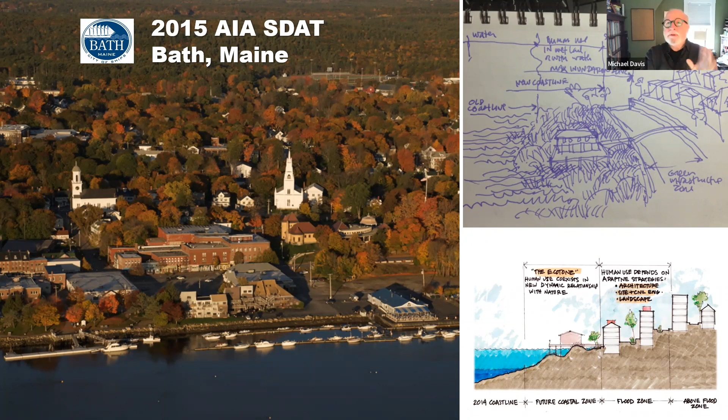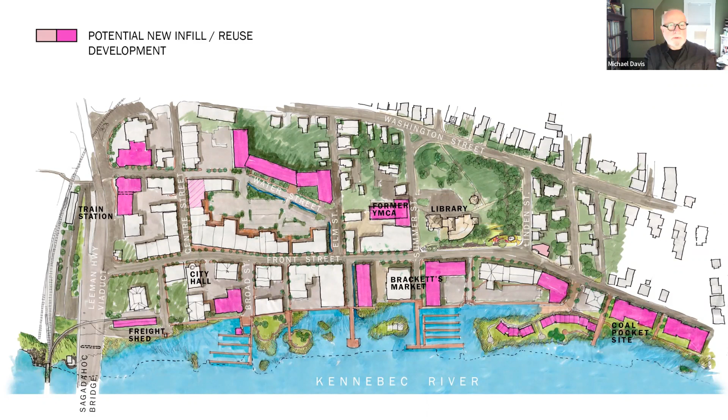So again, we're trying to say that this could be a good thing. This could still end up being a good thing for this community.

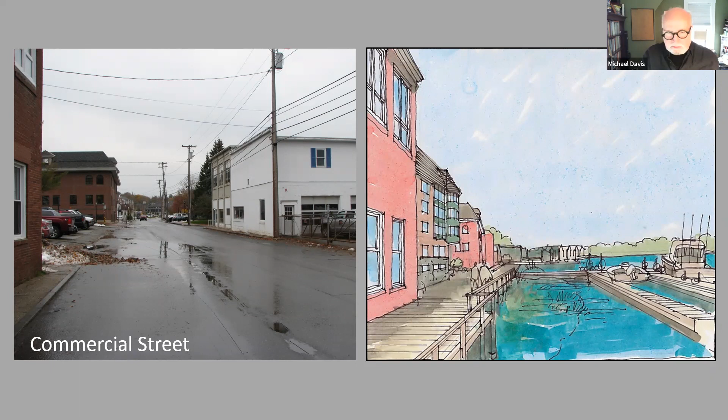Meanwhile, up on High Street, which is aptly named because the water's not going to go there, this is where you could really look for greater density. What we're showing is this beautiful little historic building with new housing on top of it, 3, 4, 5 floors of housing. We're always looking for places to put housing, especially affordable housing near a city center. So this is a good place to put housing on this building that is not going to get flooded.

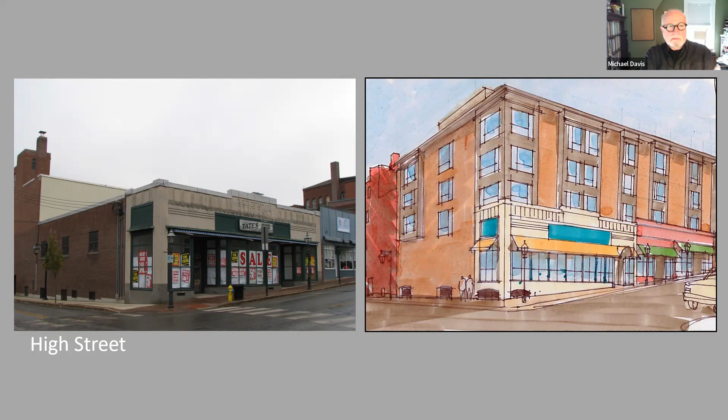And then in the middle of the city is a place aptly named Water Street. This is one of those places that we know is going to be prone to flooding. So the idea is to get the water out as soon as possible, to contain it as effectively as you can. We pulled back and did an aerial sketch of this parking lot, a lot of which has been turned into green infrastructure—a swale, a bioswale, and a basin—to take the water that gets into the site off of the site as quickly as possible.

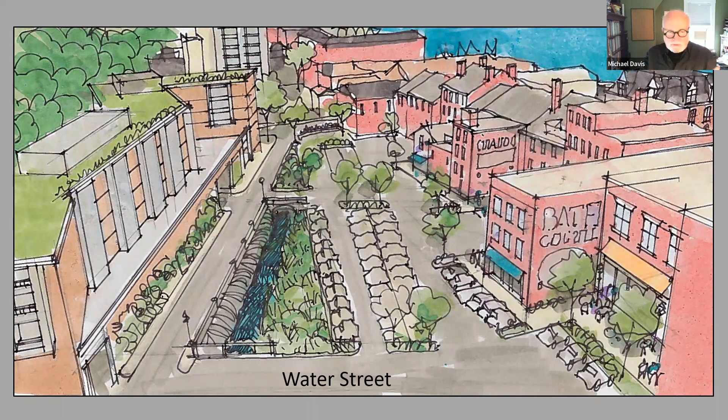And then on this uphill side, we're showing some new housing on top of parking, because the parking is going to get wet too, and we don't want to suggest there are new habitable, occupiable uses in the flood zone. So those are the kind of studies we did for Bath, Maine.

How do we fix that? Our approach was to look at the neighborhood and imagine it as a vital, thriving, connected part of the city. What would that look like? What shape would it take?

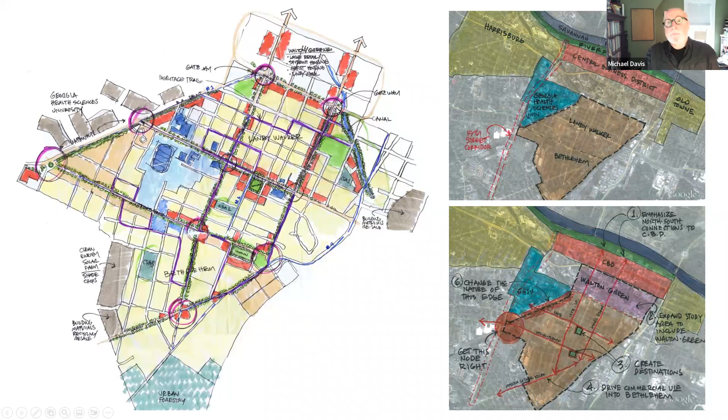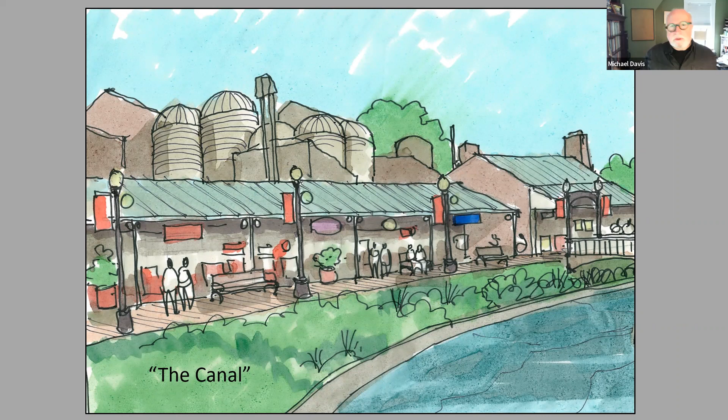Just around the corner from that site is what used to be some of their industrial sites, and it's largely abandoned. This is a canal now that serves as a bioswale for rainwater, but nobody goes here because it's in terrible shape. So we're thinking you could turn this into a promenade, make it an arts district or shopping district along the canal, really make an asset out of it, and renovate the historic industrial buildings. This could be a real important place in the neighborhood.

And then this is a really important edge. This is the edge where on the left is the hospital, that giant employment base. On the right is the neighborhood, and what separates them is the tracks. This is literally the other side of the tracks, called the Dent Boulevard. So we're saying this needs to be a really important edge of this neighborhood. We need to change this drastically.

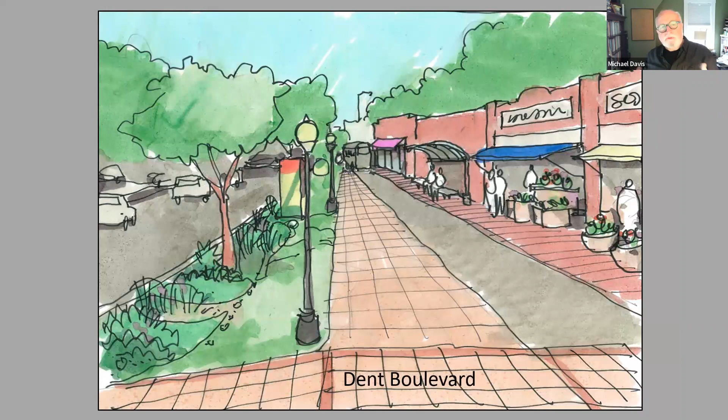And this change involves a really major step that I don't know how this happens, but we said let's get rid of the train and replace it with light rail or bus transportation. So it becomes part of the way that people get into downtown, instead of a barricade, instead of an obstacle between the employer and the residents.

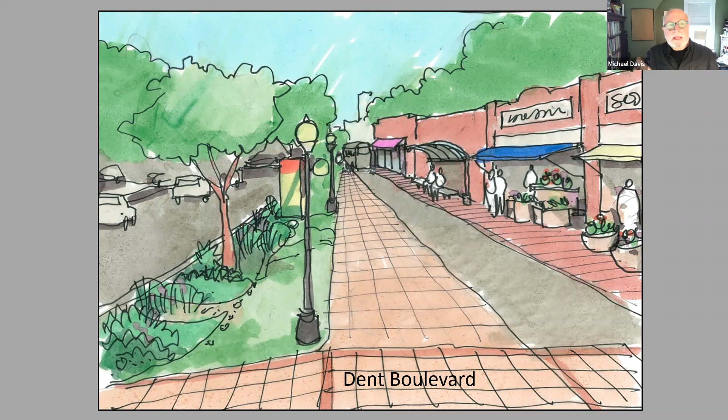So this was a big step. But part of what we're saying here is that you really need to pay attention to that edge of your neighborhood, because this is where you actually interface with the major employer. This needs to be changed. So those are the sketches that we did for Augusta, Georgia.

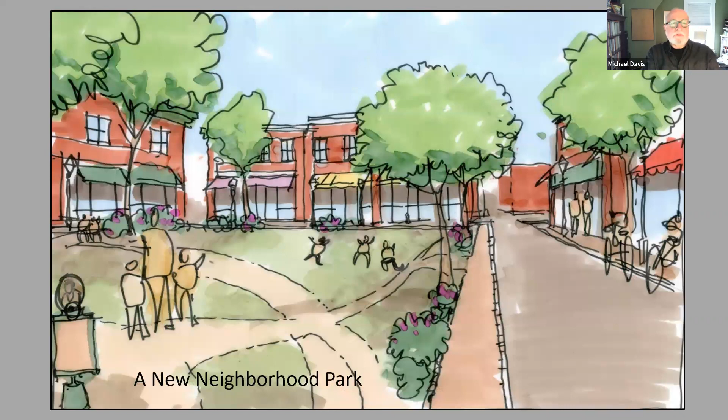And there are no parks within this neighborhood. There were absolutely no usable outdoor recreational spaces. So we said, look, take one of your empty lots, turn it into a park. It'll look like this. Every neighborhood should have these kinds of spaces in them, right?

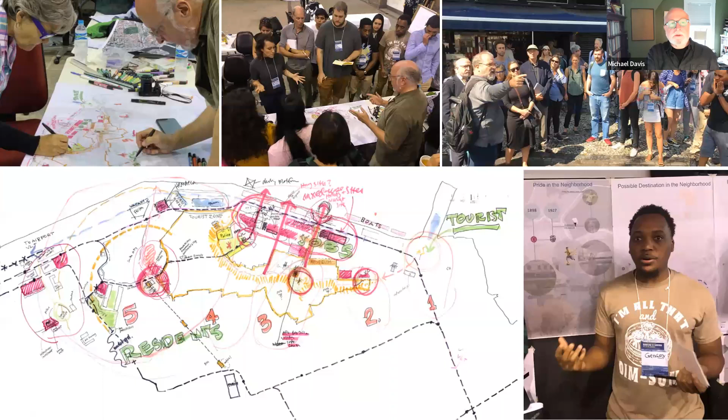We said, no, let's talk about the residents, about the favelas and what the people that live here need first, because that's really where you start. So here we are talking to some students—one of our team was from a University in Florida, and they brought a community group—and we started scribbling. This is the beginning of our map, where we're talking about here are the tourists, here's where the employment is, but here are the residents. So how do we bring all three populations together and serve all their needs?

So this was our giant master plan. We talked about these improvement zones—this one, the old warehouse district, and stuff over here, and these edges. I want to show you a couple of these sketches. This was a lot of information all at once, but again, what's cool are the sketches.

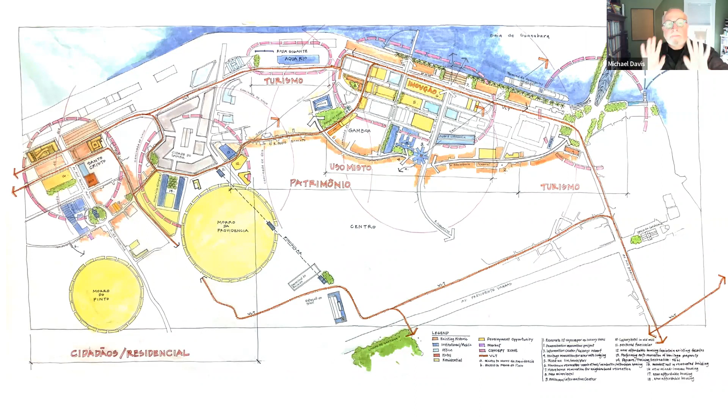This is where our work started. We said this is a historic street that marked the edge—there used to be the edge of the city. That's why that wharf, where the slave trade was, is here. So we said, let's start by celebrating that moment where the old city is on one side, the new city is on the other side, and this important landmark is in between.

So our first move was to say, let's do a visitor center on that spot, which is now just a big empty lot, where people can get up and look down at the Valongo Wharf, get oriented to where they are in the city, and also turn around and look back at the residential neighborhood right behind them. The favela starts on this edge right here.

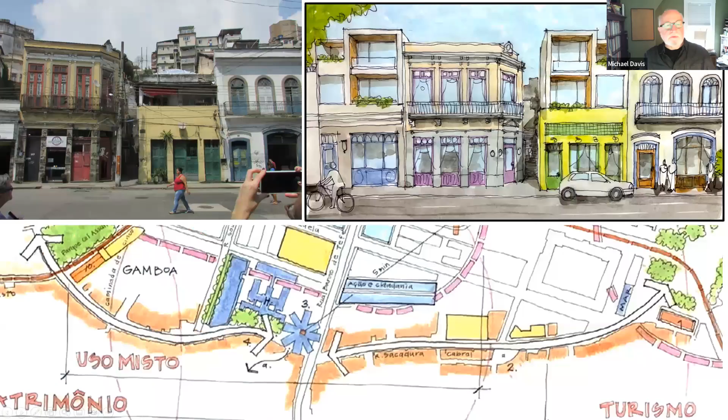And so our next sketch was of that edge. I think this may be particularly interesting, because we said there's also a hospital right here, and the hospital probably could use some housing next to it. So let's look at this decrepit edge, with some really interesting, beautiful remnants of historic buildings, and renovate it—add some new architecture in with the old, combining the new stuff with the old stuff.

At the same time, this is one of those little passageways, a little stair that gets you up into the favela—celebrating the fact that there's a residential neighborhood up here, but let's improve it, let's make it look better. Let's use new architecture to enhance and complement the historic architecture. This is something we can imagine, that we can draw.

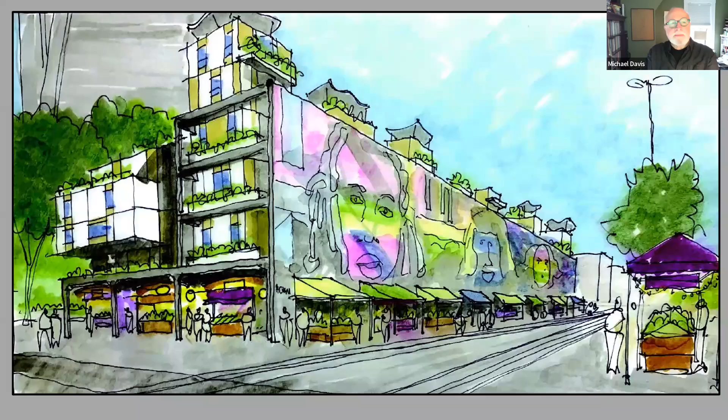But the murals are very important—they have a lot of cultural significance, and we said let's not get rid of them, but let's imagine one of these buildings: we keep the mural, and introduce a large-scale farmers market, which is something the people we talked to said they desperately need—a central place where local farmers can sell their produce—and turn the rest of it into green, affordable housing. So keep the big mural, keep the stuff about the project and the buildings that are important, and introduce uses that are needed in the community instead.

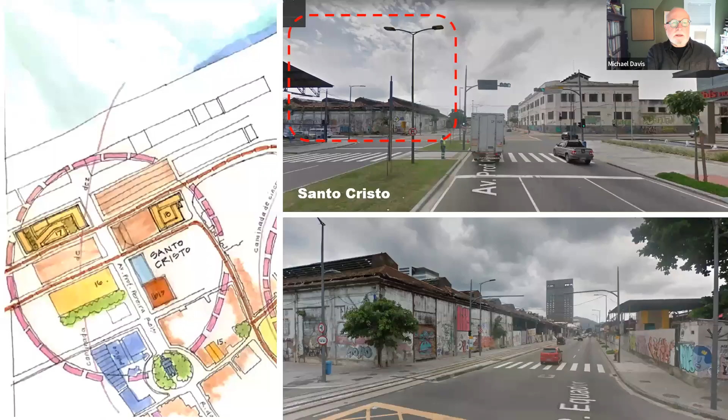And then the last one is down here in this area called Santo Cristo, which is really, really bad shape. A lot of abandoned industrial buildings, a lot of empty lots, lots of room for improvement. This is like a blank slate.

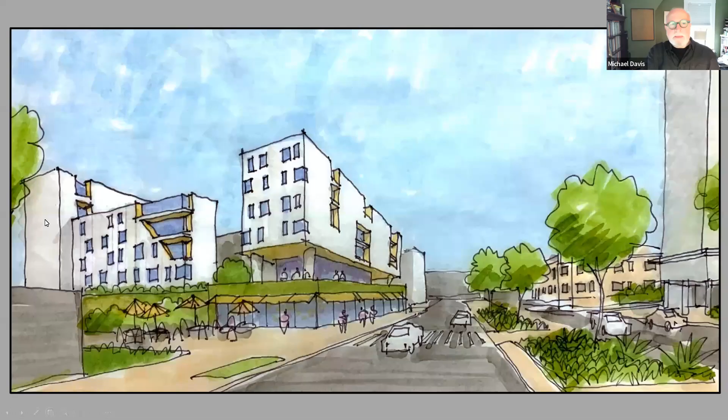So we said, let's take one of these sites and just imagine it as new affordable housing. We tried to make it a little funky, so it would feel a bit like the rest of the architecture in Rio, with active ground floor uses and an enhanced public realm. This is us saying there's so much potential here. Let us show you what the potential looks like.

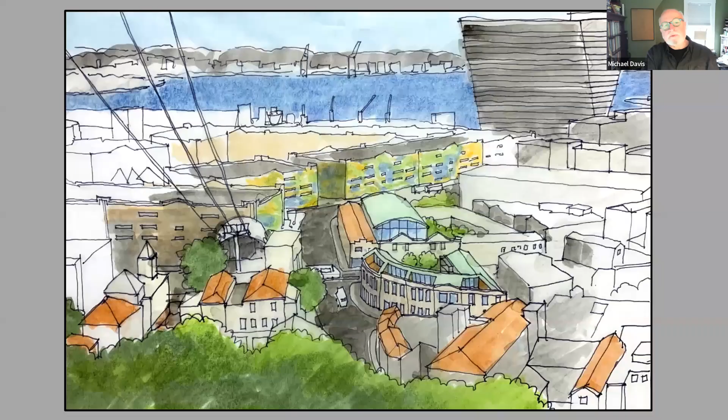And then when we went up to the favela, there was a place where you could look back down at that neighborhood and see the kind of disuse and disinvestment that happened there. And this isn't easy for us to say, but look, this is where you need daycare, you need healthcare, you need public services, and there are plenty of places to put them.

This was already a dance academy, as we understood it. It was the dance school, the teachers teach samba and salsa. So let's bring the muralists down here, let's make that stuff look as funky as those warehouse buildings, and just start to show people how this neighborhood could be better, could be an asset for them.

So that was Rio. And then the last one I want to tell you about is Louisville, Kentucky. I want to tell you about this one primarily because I learned something in this project. This was back in 2015, so it wasn't recent, but the lessons I got out of this project really stuck with me. It was a real eye-opener for me.

Similar kind of assignment, where the group that brought us in was a civic association called West of 9th. Their premise, their presentation, was that 9th Street was this kind of line in the middle of Louisville, where people said, if you go to Louisville, don't go west of 9th Street, because that's where the poverty is, that's where the crime is. As long as you stay in East Louisville, then you're safe. So don't come to West Louisville.

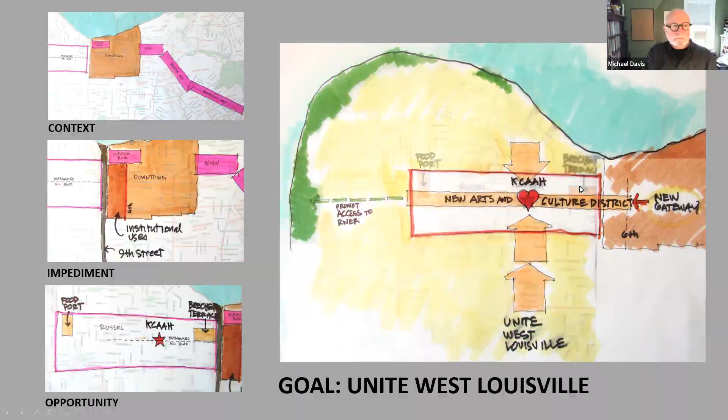But that is going to be harder than it sounds, because what 9th Street is, and this is what we learned, is something they refer to as a barrier of extra legal segregation. This divided highway, this bermed 8-lane divided highway, and all of the parking garages and the courthouses and the federal office buildings were all created purposefully to keep Black people out of the downtown and to make a barrier between that residential neighborhood and the downtown.

It was done deliberately. There's record of it. There's record of the planning for this off-ramp that was 9th Street. There's record of people from the churches that lived out in West Louisville showing up and saying, you can't do this to us, you can't do it. But they did it anyway.

So we said, this is what needs to be undone. This is institutional urban planning that is segregating, that is creating a barrier between the communities. So that was the hard part.

So we said, okay, we're going to have to change this intersection, and we're going to have to acquire some of these parcels. We're going to have to take over some of those parking lots, because we're going to need to actually connect. That's how you connect to the downtown, is to get through this block, get through these impediments.

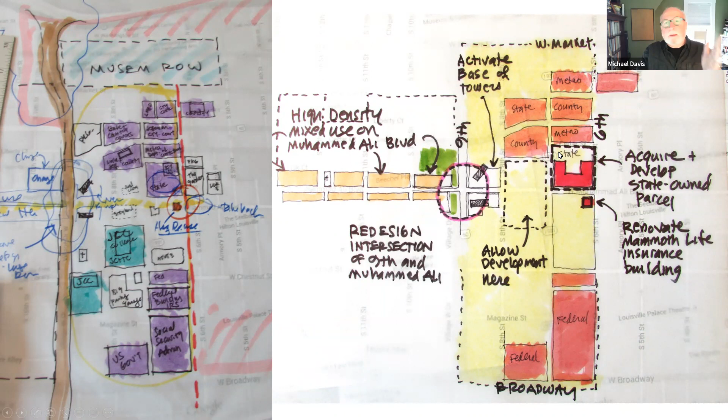So what does that look like? First, I'm going to start way out here in the edges. There's this fabulous little historic bank, the Mammoth Life Insurance building, that I want to show you what it looks like. And then there's a big dumb empty lot, a big kind of state-owned parcel, it's a parking lot right now. So there's what used to be this fabulous historic bank that's now clad in this kind of garbage material, and this is this giant state-owned parking lot.

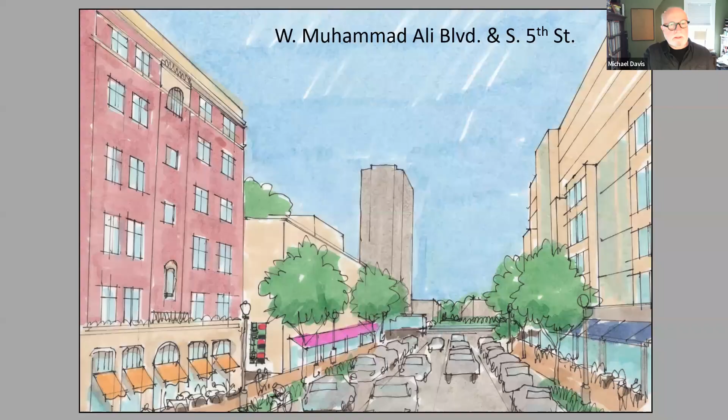So that's where we're going to start the change happening right here. We're going to strip this stuff off of that building, we're going to renovate this building, and then we're going to build new over this parking lot. We're going to actually bring some kind of density and some active uses right out onto that street and kind of start the new Muhammad Ali Boulevard, and let this penetrate through this barrier, and let the residential neighborhood connect to the downtown.

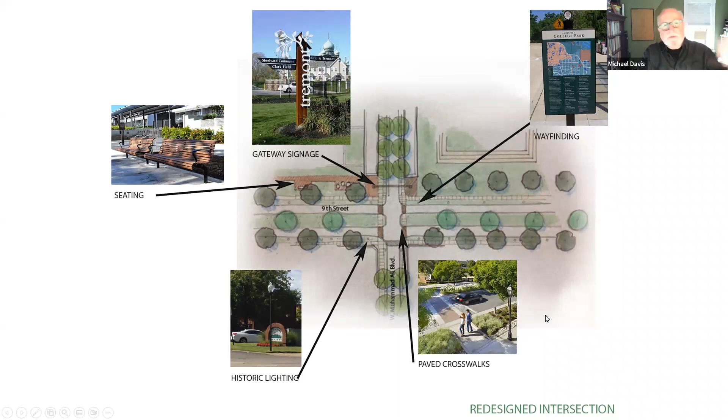Oh, and we also work with a landscape architect on these teams too. So these are some of the diagrams from the landscape architect that talk specifically about historic lighting, gateway signage, neck downs, shorter crosswalks, paved crosswalks, wayfinding and seating. And so that was the kind of plan illustration of that.

This is what we refer to as a complete street, and this is a really good, tried and tested and true approach to creating a public realm, a beneficial public realm.

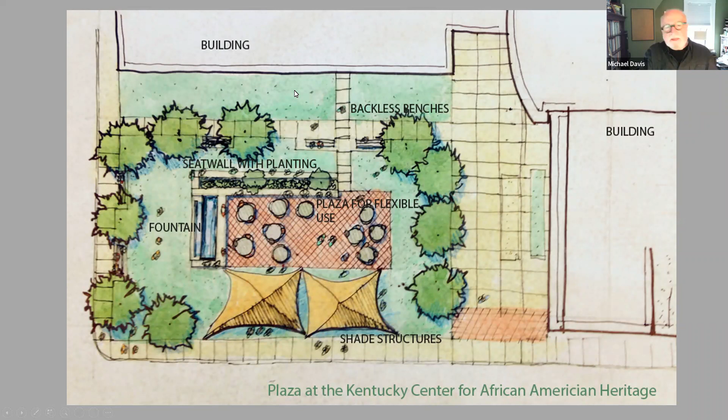So again, this is the landscaper's approach, and part of her thinking is that this doesn't all need to be a high level of investment. It could just be some open plaza seating, some tents for temporary use, some nice landscaping, a little water feature, and some seating. And take the fence down, by the way. That would be enough. So here's what that looks like.

It's really about bringing a kind of civic pride. It's about having the architecture, having the design, actually creating the sense of place that you want this community to have, and trying to build some pride on the part of the people that live here. This is us as designers coming in and understanding what the community needs, illustrating it for them, giving them examples of what they would like to see happen, and what would actually build a sense of civic pride in this community.

And then what happens is if people see this and say, yeah, that's what we want, they can go to their elected officials and say, this is what we want — affordable housing in this neighborhood, for example — and then that becomes a project. It becomes a project for architects, so we're in there doing the work, and we get paid to do that. If they said we really need housing investment here, that would be a paid project. But this kind of contribution of services, this donation of services, this architecture as advocacy, is what starts the whole ball rolling, and that's why I do it.

So I'm going to breathe now.

Thank you for sitting through this. It's too bad this isn't live, because I would love to take questions right now. Well, don't worry, I have some for you. Oh, good, go for it.